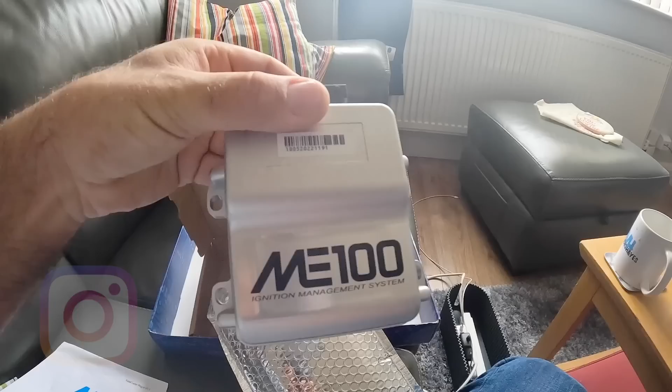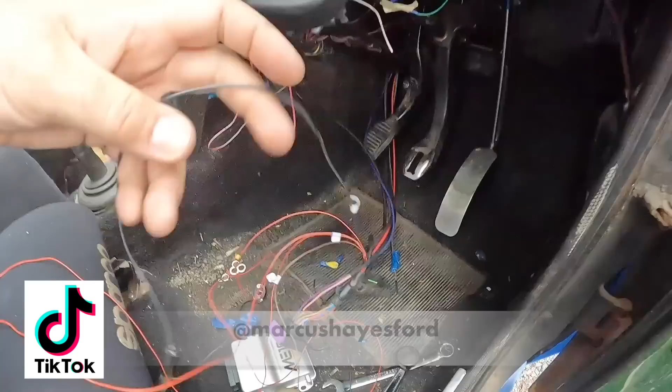One company that I've trusted with my engine management, Motorsport Electronics. The brand new ME100, packed full of features. Get this ECU installed. Maude, my Motorsport Mk2 Escort, finally ready to plug everything in. Red wires, 12 volt feed, black wire to ground. So, moment of truth, key on. Yeah, these Motorsport Electronics ECUs, they always fire up straight from the base map.

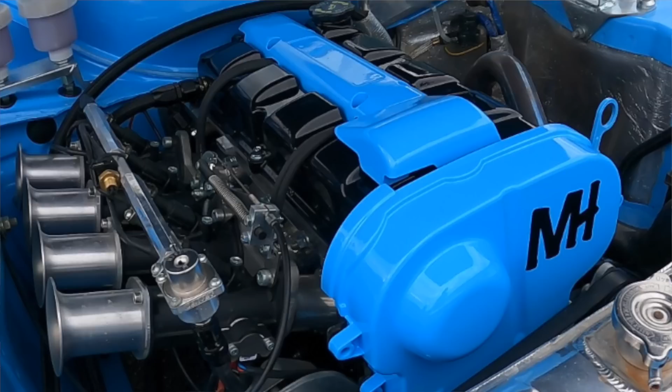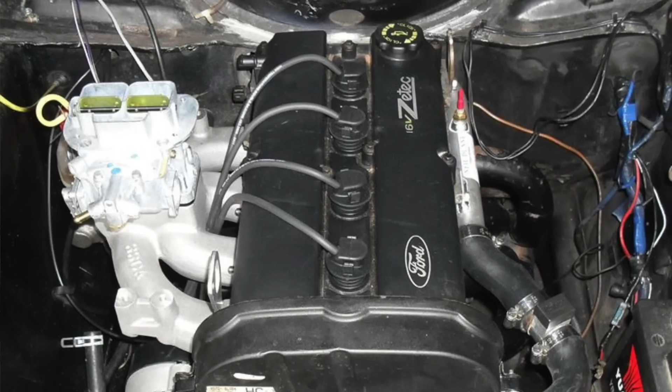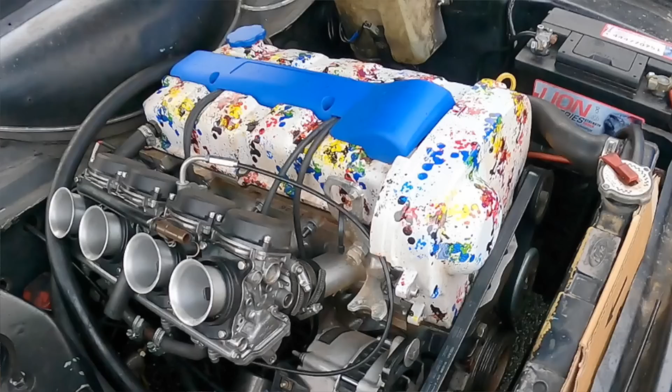My favourite car, a Mark 1 Escort that I like to call INSTA, is running a fuel-injected ST170 engine, and that's controlled by an ME221 ECU from Motorsport Electronics, which is an awesome bit of kit. But today we're going to be looking at another Escort that I own, a four-door Mark 2 that I like to call Maude. Now previously she was running a normal 2 litre Zetec engine, which was controlled by an old Nodez Pro ignition only ECU from Motorsport Electronics, which controlled her very simple setup very well. But when I switched to an ST170 engine, I needed something that could control the VVT on an ST170. So I needed to upgrade to the ME100 ECU from Motorsport Electronics.

Now recently, Motorsport Electronics decided to update their ME100 ECU, and they very kindly sent me their brand new version for me to try out. So yeah, I'm really excited to be one of the first people in the world to try the new ME100 out. So I think it's about time we have a look in the box to check out the new ME100.

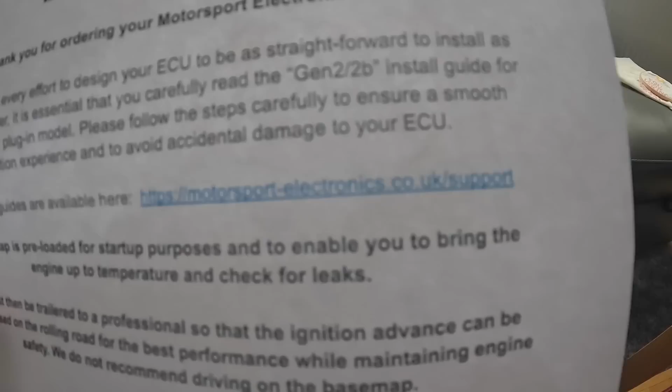Alright, now I have already had this open, but if we open the outer box, you're first greeted with this letter from Motorsport Electronics with some useful information about where to find your install guides and that sort of thing. Now inside this box you've got two boxes, one's got the ECU and one's got the wiring loom. So there's the wiring loom, which we'll have a look at in a minute. But in here, inside this jiffy bag, we've got the new ME100.

A couple of things that are new about this compared to the old ME100 is that this is now in a proper waterproof case. So you could, if you wanted to, mount this in the engine bay rather than bringing it inside the cockpit. And it has a status LED, which I think is going to be a really useful addition. And in terms of what it does compared to the Nodez, it's basically the same sort of thing, but this is capable of running the VVT on an ST170 engine. I think it's really cool that Motorsport Electronics do various different ECUs depending on what setup you've got. Anyway, that is the ECU.

And I think before we have a look at the loom, I'll quickly show you on their website all the features. As I say, I'm not an expert, so I might as well just show you what it says on the Motorsport Electronics website. So onto the Motorsport Electronics website. I'm just going to go over here to the Nodez Pro ignition only system and click that. As I say, the new ME100 is based around the new Nodez.

And down here you can see the key features: 16x16 3D ignition table, direct coil drive, wasted spark ignition. The Motorsport Electronics ECUs actually have the coil drivers built in. You don't need any separate EDIS modules or anything like that, like you do on some ECUs. It works for various different trigger patterns, which basically means you can use it on Ford engines, Vauxhall engines, all different engines.

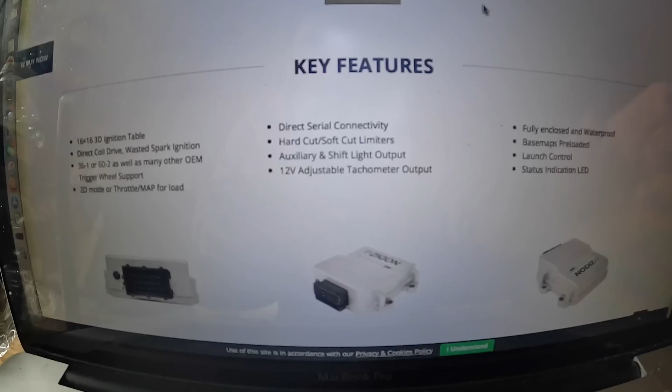You can run it in 2D mode, which is a really simple way, or you can have throttle position sensor or map sensor for load to make it 3D. Direct serial connectivity, which is basically the fact that it connects directly to your laptop with a wire. You've got hard cut and soft cut rev limiters, auxiliary and shift light outputs. Got 12 volt adjustable rev counter or tachometer output.

As I've already mentioned, the casing is fully enclosed and waterproof. It comes with a preloaded base map. You've got launch control, and as I've already mentioned, this one has the status indicator LED. So yeah, packed full of features. You can run a shift light, you can run your launch control, and as I say, the ME100 has the added ability of running the VVT on your ST170 engine.

Now let's have a little look at the loom. Because the new ME100 isn't available yet, and because it's based around the Nodez, Motorsport Electronics have actually sent me a Nodez loom, but they did add the connector for the VVT control. But one thing I did have to add myself, which was available separately from the guys at Motorsport Electronics, is the throttle position sensor wiring, which isn't necessary if you want to run it in a more 2D mode, but I've got a throttle position sensor on the bike carbs on this car.

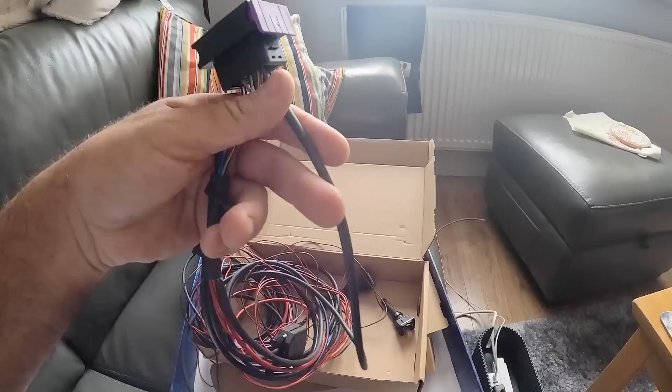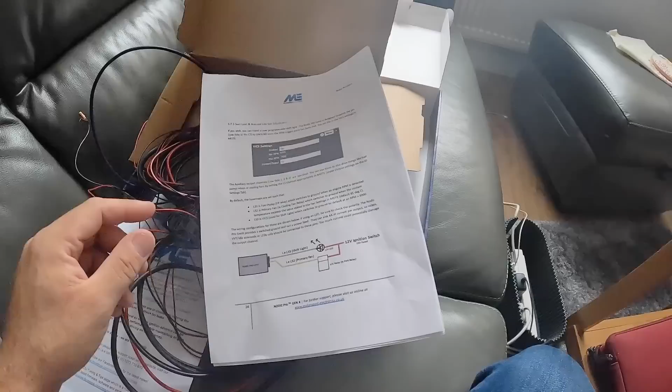And yeah, it was really, really simple to install. Obviously, I had to take apart the multi-plug carefully and stuff, and just poke the 3 wires for the TPS into their relevant pins. The user manual makes it really clear and shows you which pins those wires need to be pushed into. I've actually printed out a few pages of the user manual just to take with me around the garage today. And here's the table showing what wires go into where.

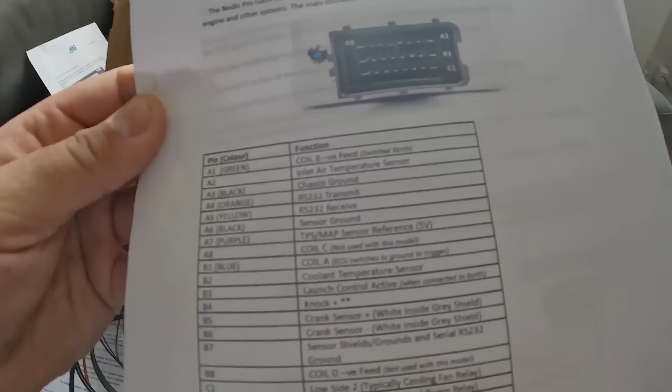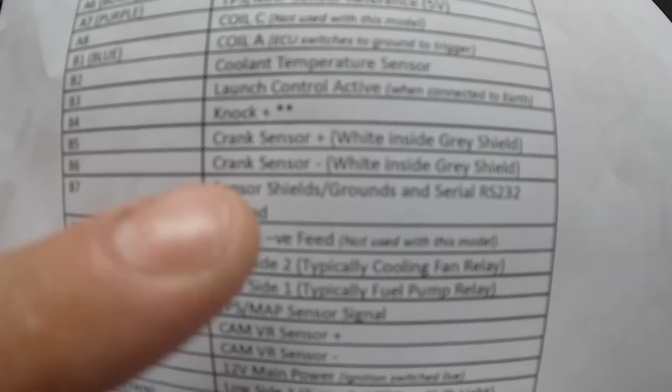You can see here, TPS map sensor reference. That was one of the wires I had to install. TPS map sensor signal. That was one of the others. And then any sensor wires that you add, the ground wire for those needs to go to this one, which is A6. So yeah, simple enough to do.

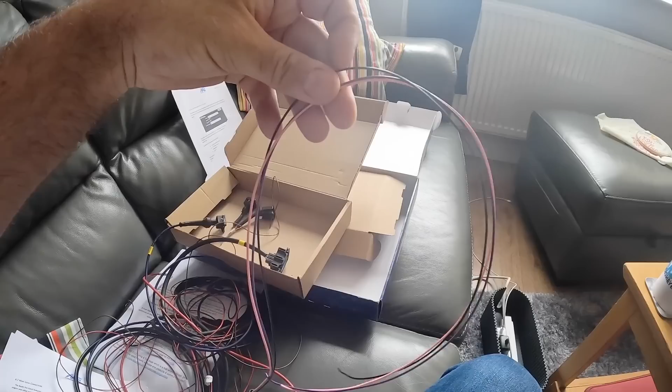One thing I am also going to need to do is change the plug for the cam sensor. This actually came with a normal Zetec cam sensor plug on it because, as I say, it is a Maude loom, but I did have an ST170 cam sensor plug on my old ME100 loom. So I just need to add that to the loom when the time comes, and I need to finish up the other end of the TPS wiring that I just showed you. The reason I haven't finished those up yet is because I may as well run the leads in the engine bay and then make those wires the correct length that they need to be, rather than them being too long and it being any less tidy than it needs to be.

So yeah, I hope all that made sense. As I say, I'm not an expert. I hope I haven't waffled too much. I think it's about time I boxed this all back up and got myself round the garage where the car is, and then we can get this ECU installed. So I'll see you in a sec.

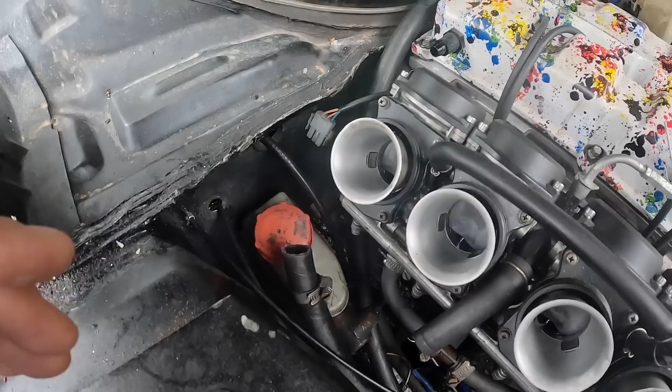Apologies for the background noise, the gardeners are mowing the lawn, but I am now around the garage with Maude, my four-door Mk2 Escort. And the first thing I think I'm going to be doing in terms of installing this ECU is running the wiring loom where it needs to go.

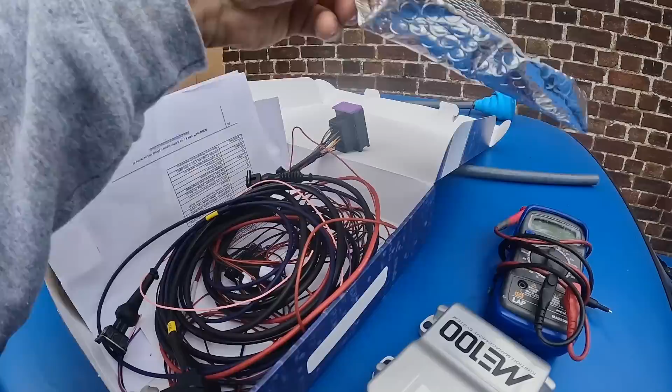Now, I've actually got a hole in the bulkhead down here, which I've used for the wiring loom for the ECU before. For those who are interested, that massive hole was actually originally drilled in the bulkhead to run the oil pipe through. I've got one there and one that side because this car used to run a dry sumped crossflow. Anyway, back on topic. As I say, I'm going to run the wiring loom. Rather than trying to pass this through, I'm going to try and pass all these smaller plugs through from the other way individually. This is the largest of them all, that's the coil pack plug.

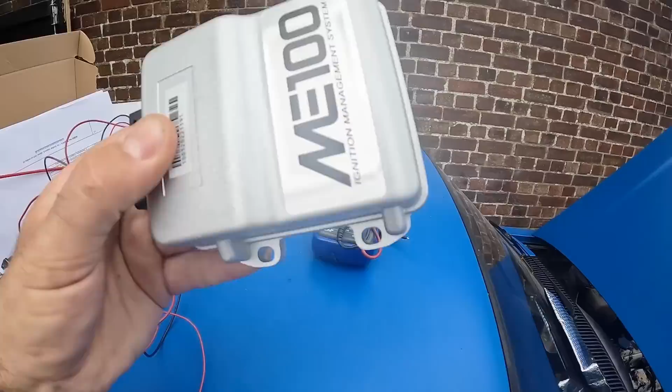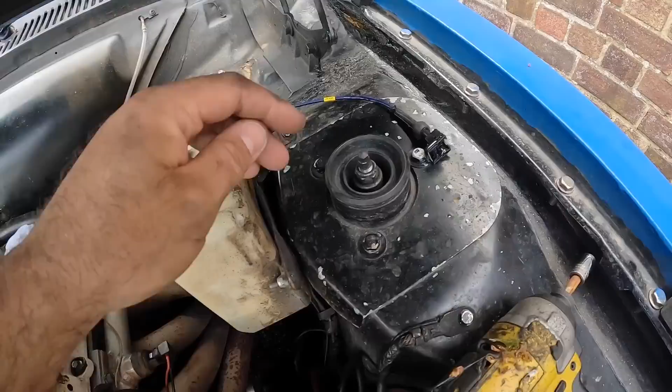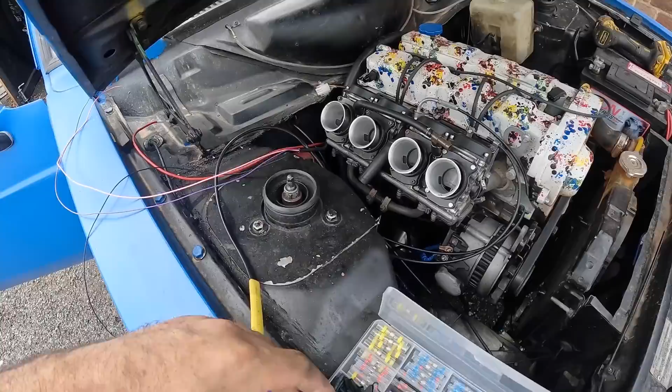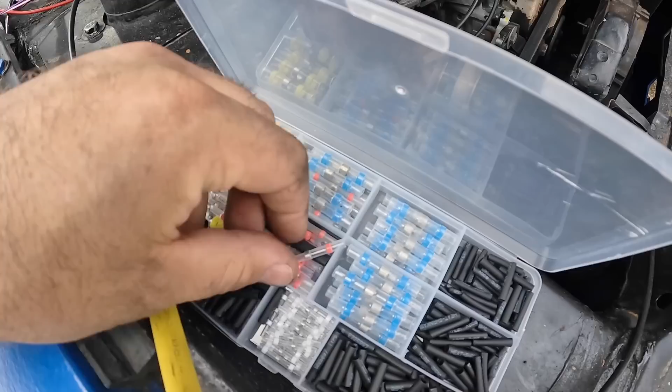But as I've already mentioned, because the new Maude and the new ME100 is waterproof, you could just mount the ECU in the engine bay, and then you only need to run a few thin wires through into the cockpit to wire it up. It's just these black and red ones. But I'm going to be mounting this inside on my switch panel. It's cool that because this is waterproof, you can choose where you want to mount it. So I'm going to see if I can run these wires where they need to go, and then I'll catch up with you afterwards.

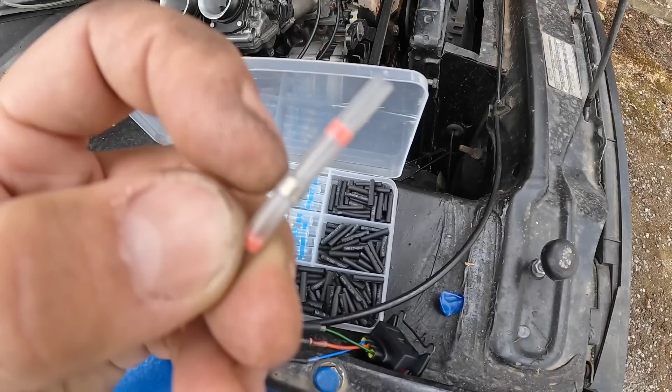Alright, so I've taken my time and I've made sure that I've got all the wires that need to be in the engine bay side through that hole in the bulkhead. In the cabin now, I've just got the multi-plug for the ECU, because as I say, I'm going to be mounting the ECU inside the cabin. And then I've got these thin wires here. The red ones are power, the black one is ground, and the brown one is for rev counter.

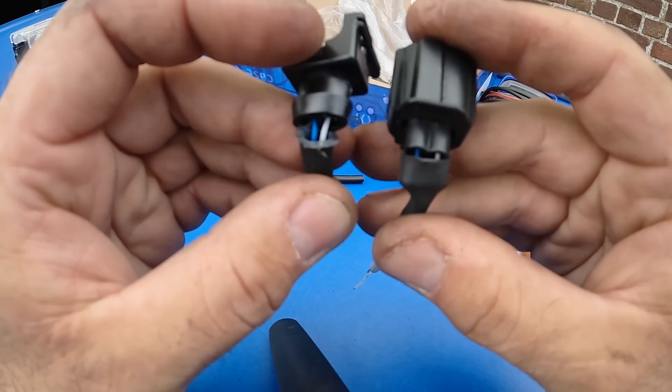And then round to the engine bay, I've got the cam sensor wire here, which plugs into the cam sensor there. I've got the throttle position sensor wires here that plug into this, which is the throttle position sensor wiring. Both of those need the plugs added to them. Over this side, I've got the crank sensor plug, because the crank sensor is down there.

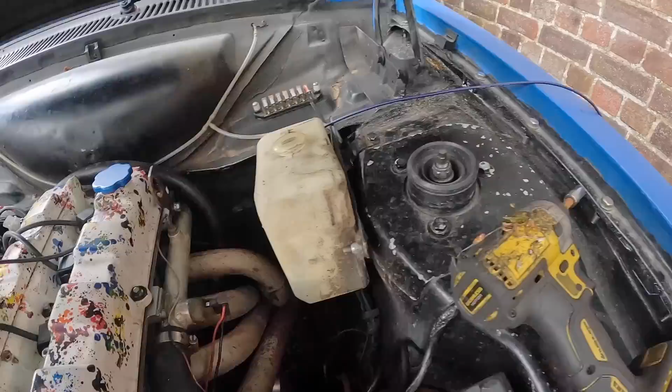And over here, I've got the coil pack plug, which I actually ended up cutting and then feeding the wires through and then reconnecting the plug, because this was a little bit too big to get through that hole without me risking putting the wires under strain.

And I'm actually using these solder crimps that I've never used before. Basically, you feed this onto one wire and then twist it to the other side of the wire and then pull it back through so that your joint is here, and then you heat this up, and that's actually solder in there, so it solders the joint.

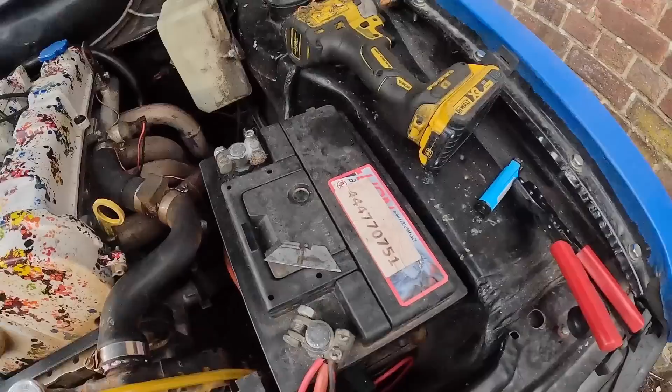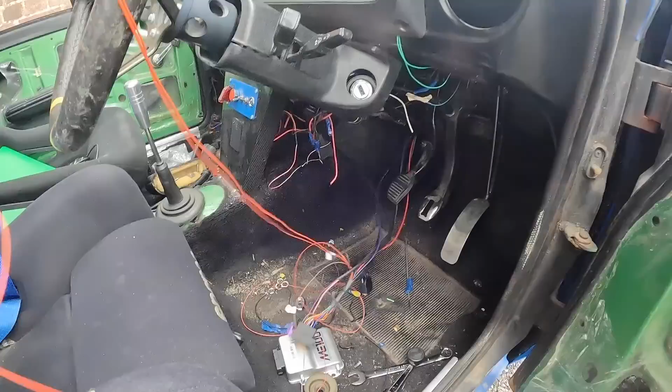But what I did do is I threaded on an extra bit of heat shrink before I started, so that then I can put that over just as a double layer of protection. So yeah, just need to heat this one up and then that'll be sweet. Do have this yellow heat shrink to pull over the lot of it afterwards. Going to cut this original insulation off. Unfortunately, I didn't have any big heat shrink that was black, but that'll be a nice reliable connection. And as I say, all the wiring is now where it needs to be.

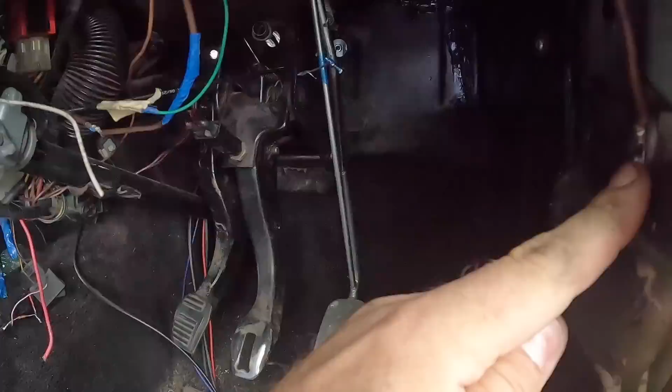What I'm going to do now is put the ST170 cam sensor plug on here, and I'm going to put the throttle position sensor plug on here. Now, because I had the old ME100 in the car before, the throttle position sensor is actually going to be very easy. This was actually a plug that I added myself to the old ME100 loom, and I made sure that the colours of wires were in the right place, and when I put the pink, black and purple wires onto this loom, I made sure that they were clicked into the right place.

I've literally just got to join these up and match the colours, and then I'll be able to plug this into the plug that's already attached to my throttle position sensor. So yeah, just plug that in there, and then I'll be able to calibrate my throttle position sensor and use that how I was before.

But if you need to wire up your throttle position sensor for the first time, like I had to on the old ME100 and like I had to on my Mk2 Escort that's running the ME2 ECU, it's very clearly explained in the manuals for the ECUs, which can be downloaded from the Motorsport Electronics website.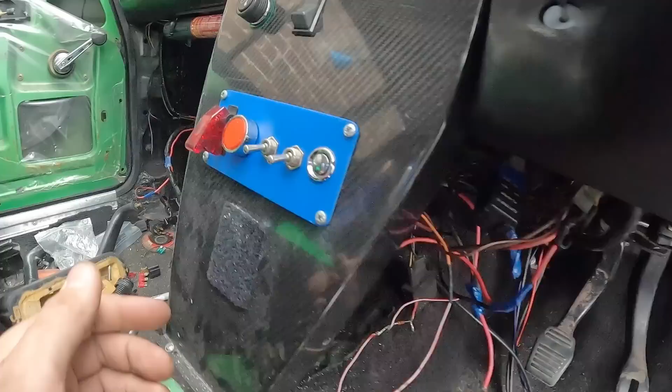And I will just quickly mention that with the two types of cam sensor plug, this is the ST170 and this is the normal Zetec one, the wires that Motorsport Electronics have used are the same colours. So again, I've just got to match blue for blue and white for white. It does have this extra wire here, which I think is like a shield thing, and that doesn't seem to actually go all the way to the end. It doesn't connect to any of these, but I will join that with the one that's on the loom anyway.

But just like earlier on, I'm not going to bore you with the process of me sorting out all these plugs. I'm not an auto electrician anyway. I'm just going to crack on with it and I'll show you what it looks like afterwards.

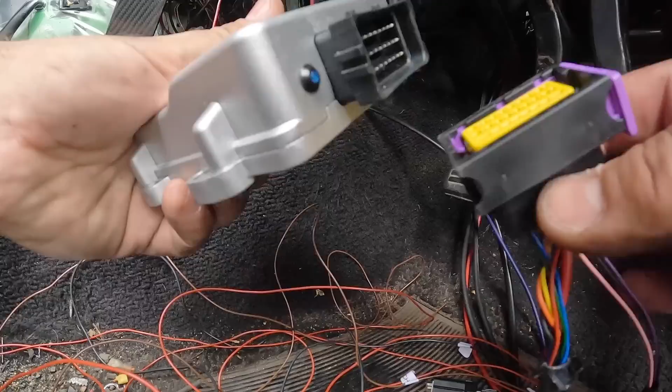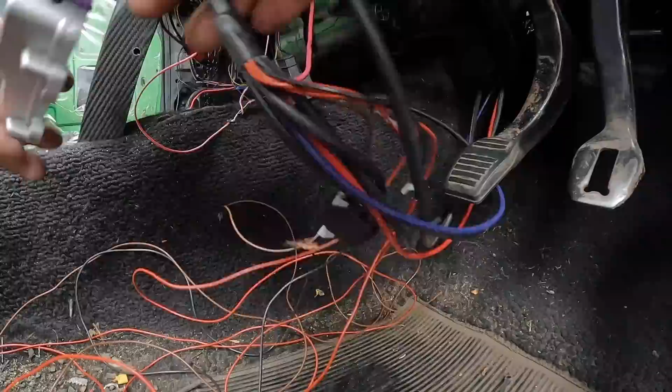Alright, so I'm finally ready to plug everything in the engine bay side of things. There's the VVT solenoid plug there. Don't think I mentioned that one earlier. Bit of a wiggle and she's on. Cam sensor there. I can plug my existing throttle position sensor plug into the loom like that.

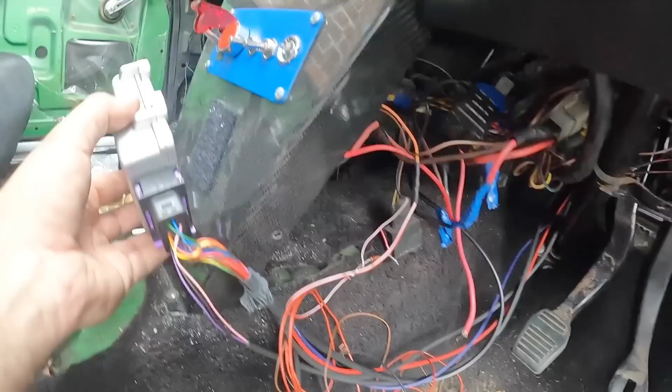Now my coil pack is actually mounted under the inlet manifold. That is the coil pack plugged in. And then we've just got the crank sensor, which is an absolute nightmare with this exhaust manifold, but we'll get it done.

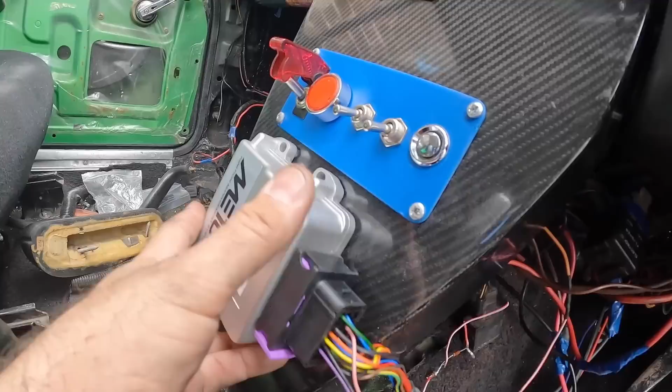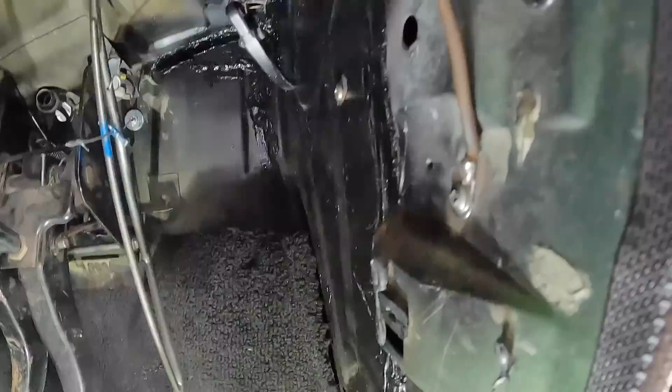So yeah, you can see the crank sensor plugged in down there, but definitely need to lose some of this excess wiring. Don't want that rubbing on the exhaust. What I normally do is add like a heat-proof sleeve to the crank sensor wiring, just because it's so close to the exhaust manifold, but I don't have that stuff in this garage. That's in the garages where I store my other cars. So for now, we'll just make sure that it's not leaning on the exhaust manifold.

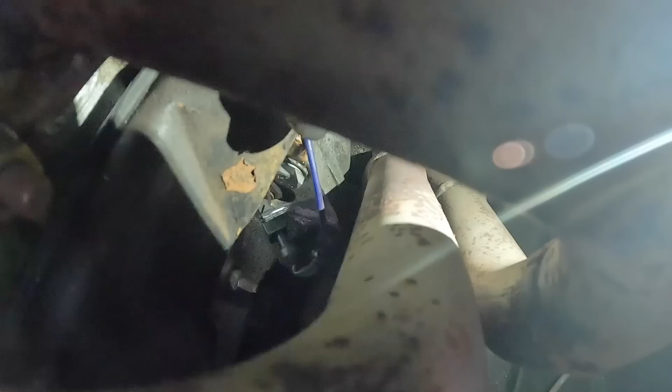So that's the engine bay side of the wiring. So now I'm going to move inside the cabin and actually go about powering up the ECU. Before we mess about with those wires inside, we're going to disconnect this battery. So inside the cabin, powering up the ECU is literally a case of hooking all these red wires from the plug and play loom up to a 12-volt switched feed, and hooking up this black wire to ground, which basically means it needs to go to the body of the car.

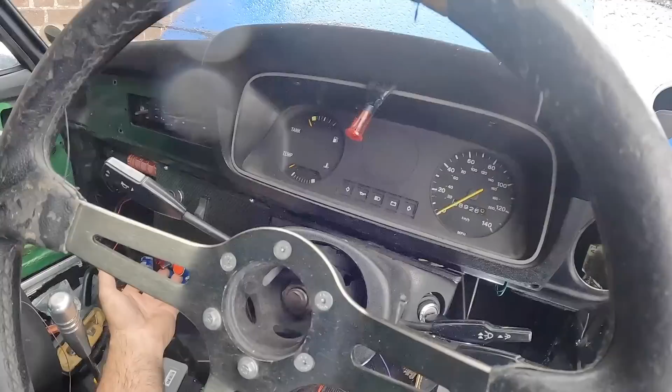Now, because I've already had an ECU wired up in here in the past, this is my 12-volt feed, and this brown wire here goes to the body. Now, the 12-volt feed should be wired up through a relay, and I've actually got relays over there on the kick panel. One's for my fuel pump and one for the ECU.

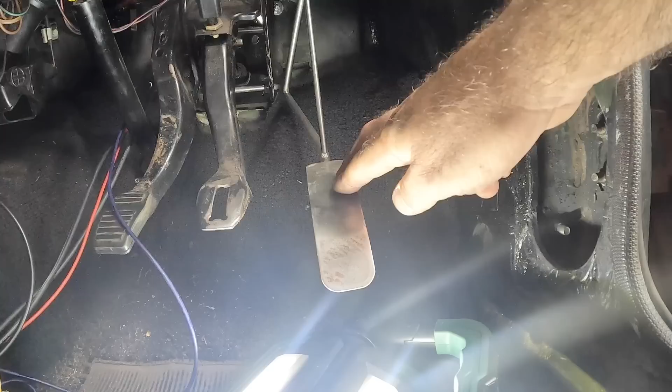Now, there are loads of videos on YouTube showing how to wire up a relay and what exactly it does, but basically what it means is that you're not putting the whole feed through your ignition barrel and then to the ECU. You're taking a small bit of current through your ignition barrel, which triggers the relay, and then the other side of the relay is connected directly to the battery, and the higher load that will be powering the ECU goes from the battery straight to the ECU.

I hope that makes sense, but as I say, I'm not an auto electrician, so check out the other videos on YouTube showing exactly what a relay does, but you should run your ECU through a relay. Now, the way that my car's wired up is you put the key in the ignition and turn it, and then it sends current to this switch panel, and then if I switch on this main power switch, it powers up everything on the car. This is actually the start button to start the engine.

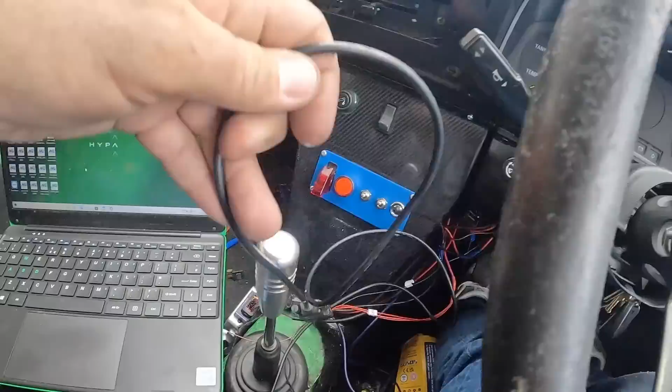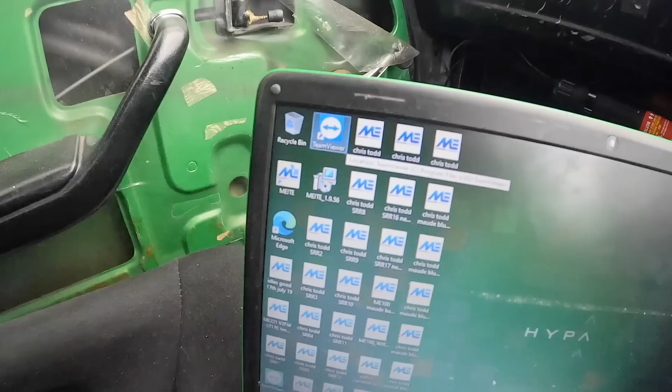But yeah, from here it then goes into the relays, and on the earth side of the trigger side of that relay, it then goes back through this switch. So once this is powered on, and once the switch for the ECU is on, it completes the circuit to ground, the relay clicks on, and then the ECU comes on. So all I need to do, because my relays are already set up from before, is hook up these 3 red wires to this red wire here, and the black wire to this brown wire here.

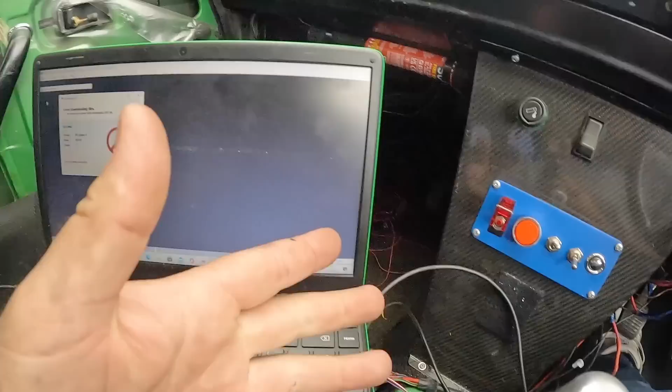So I'm just going to plug the plug into the ECU. Got this purple bit that you pull out, and then click it in. Start thinking about where I'm going to be mounting this and how exactly the wires are going to be, because I want to cut all these red wires shorter so they're not stupidly long.

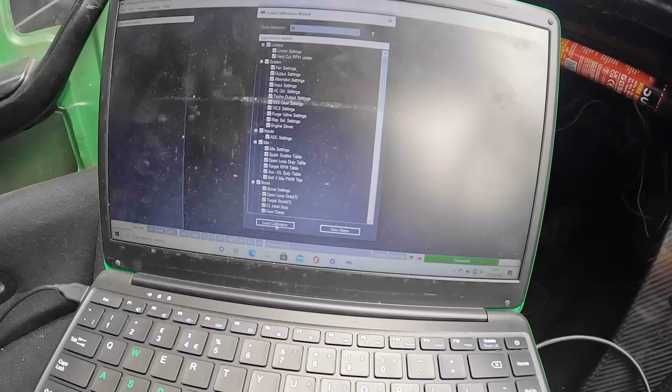Now, annoyingly, I don't have my roll of Velcro here. I like to Velcro these to the switch panel, because then if you ever park it up somewhere and you're a bit unsure about leaving your car there, you can literally unplug the ECU, put it in your pocket, and it adds another layer of security. But yeah, I just want to roughly get this in place and roughly cut these red wires and the black wire to length, and then we'll wire them up.

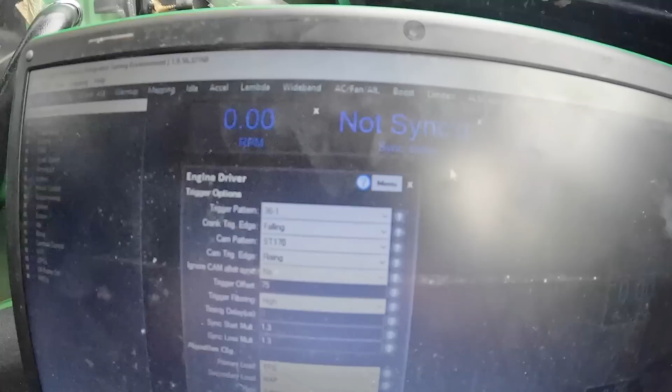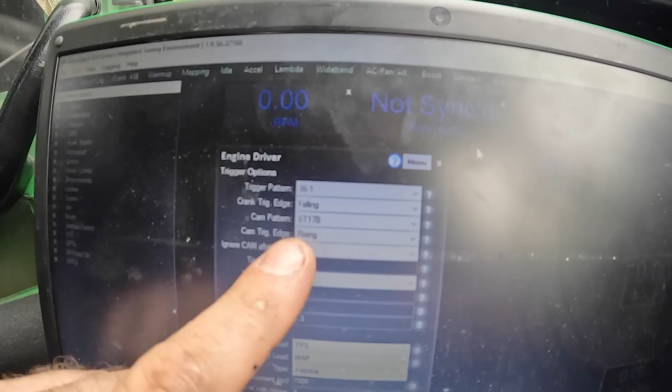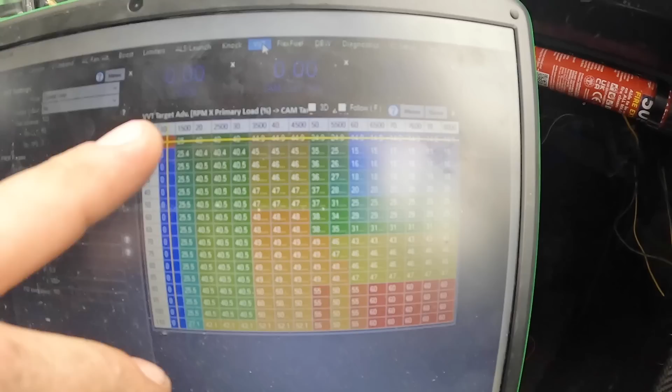Alright, so now in theory we have power going to the ECU, and we've got the ground going to the body. I'm going to pull some of the slack on this crank sensor wire, so I don't want that wire rubbing on the exhaust. I can see now that that purple wire isn't leaning on the exhaust. So yeah, just a final check that everything's plugged in, and we should be good to go. Now, the ME100 will have some sort of base map loaded onto it, obviously to suit a Zetec or an ST170. I'm pretty confident that this will fire straight up.

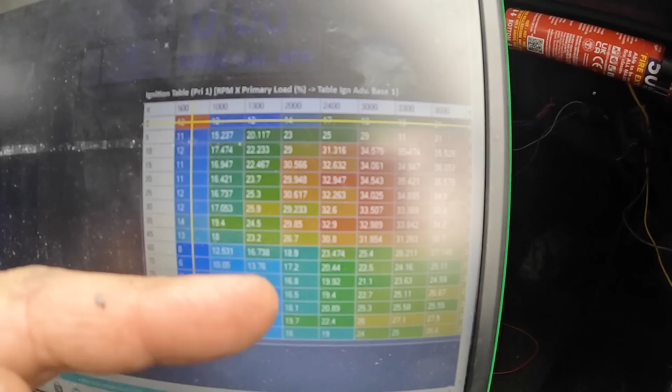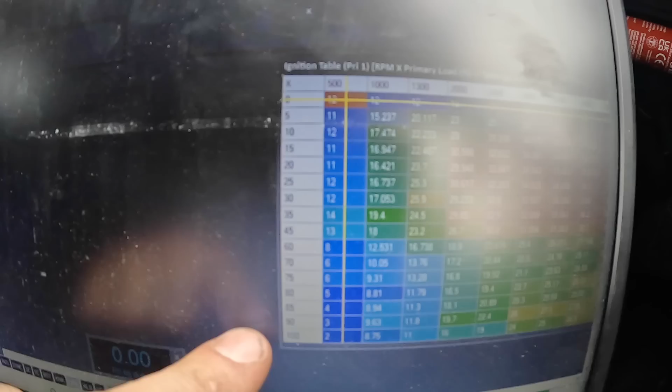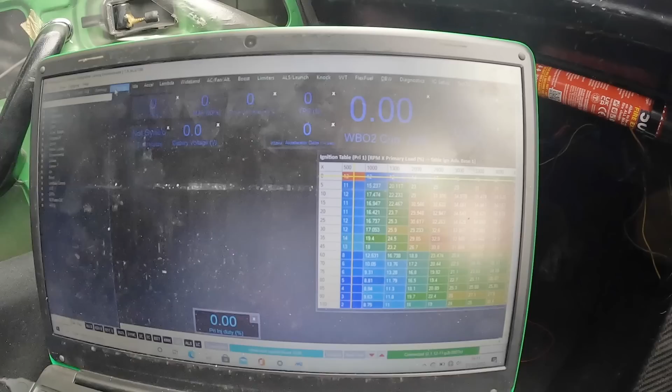So, moment of truth, key on, and then this up, which should bring up, yep, the dash lights. One of these will be fuel pump. It must be this one, that must be the ECU. As you can see, the LED is flashing on the ME100, so that's the ECU powered up. Now I can power up the fuel pump, check she's in neutral, push the start button. She's definitely trying to fire. Yeah, this car hasn't run for weeks, that's why it took a while.

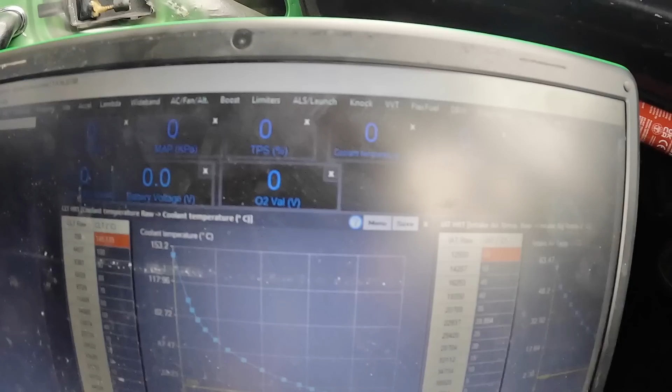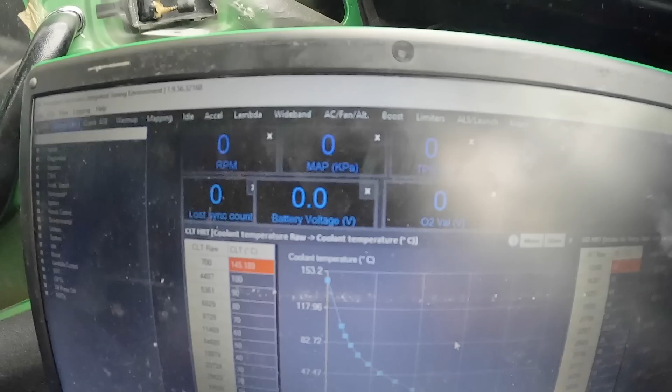And it runs. Running all 4 cylinders, idling pretty good, to be honest. Yeah, these Motorsport Electronics ECUs, they always fire up straight from the base map, but you do need to go and get it rolling roaded and tuned properly to get the most out of them.

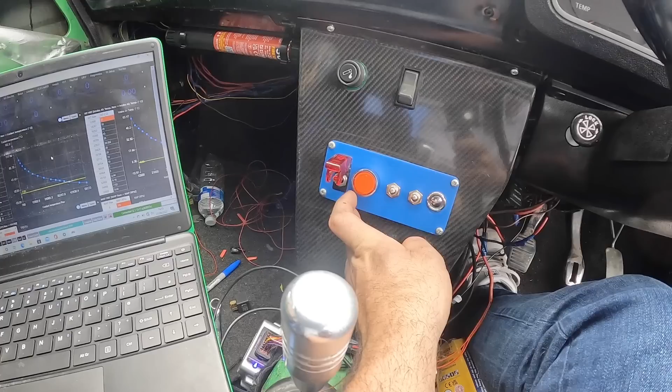Okay, we'll flick that off, and now we'll fire up the laptop and see exactly what's going on with the settings on the ME100. All right, so I've got my laptop on, and I've now got the ME100 plugged in to the laptop. This little connector here that comes out of the back of the loom near the ECU plug has got a connection so you can hook up these wires, which then go into the USB port on your laptop. You can get these wires from Motorsport Electronics.

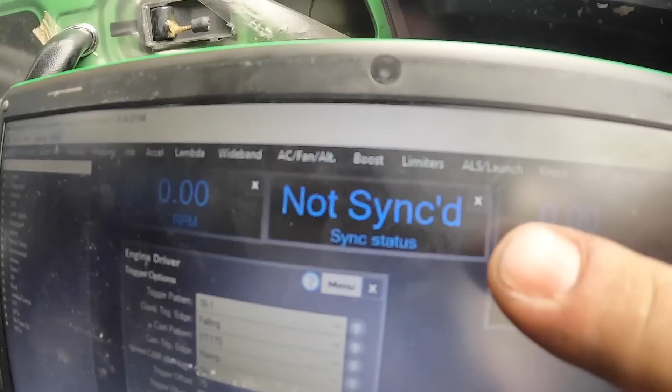Anyway, I'm going to open up the MITE software, which stands for Motorsport Electronics Integrated Tuning Environment. This can be downloaded from the Motorsport Electronics website. So we'll just double click that. Wait for the software to load up. Click the key on, put this switch on. Don't need the fuel pump on. And the ECU switch is already on.

Now we've got a bit of an error here, although the ECU has connected because it's green. And I'm guessing this is because I've used this software on older ECUs, so the old ME100 and the ME221. Okay, so it looks like it wants to update, but I don't have any internet around here. What I'm going to do is I'm going to try and load my old map into it. Don't think it's going to work.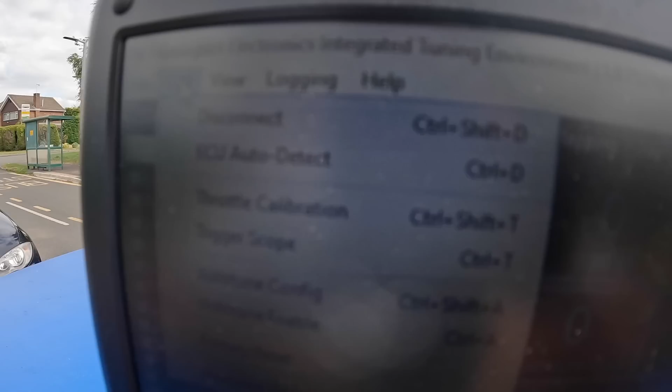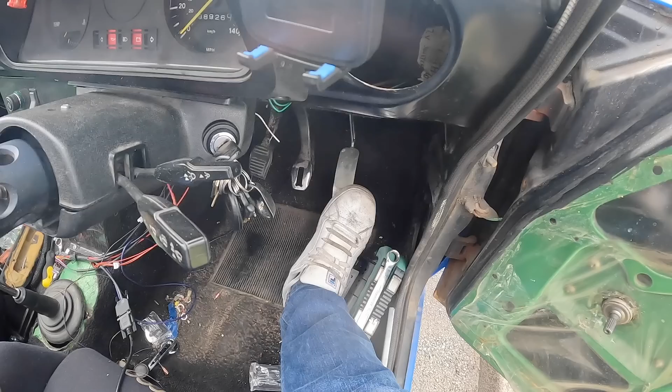There it is there. ECU data not fully loaded or still trying to connect. Would you like to switch off line mode? Yes. Right, let's just load it, see what happens. Do you want to send this data to the ECU? This will erase the existing data. Yes. Calibration loaded successfully. It looks like my map has now loaded into the new ME100, so yeah, everything should be how it was on my old ME100.

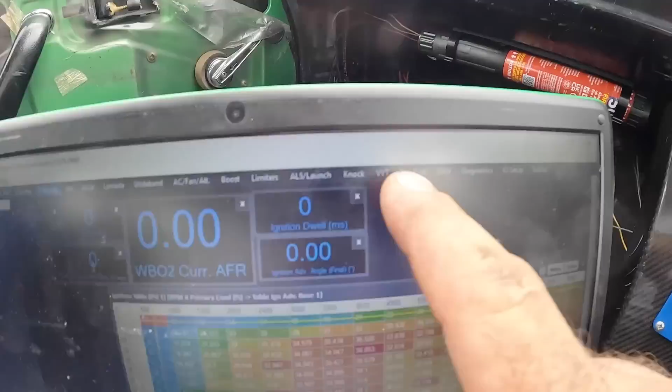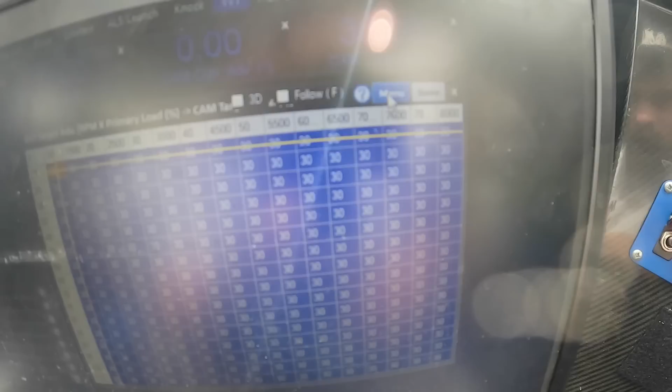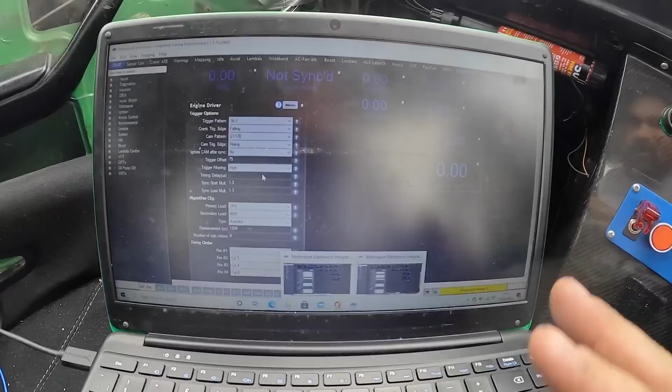I will just show you a couple of things. The cam pattern here, when it's set to ST170, that's what you need to do when you're running an ST170, obviously, and that turns on the cam sensor and allows the VVT to run. Now, if we go up here to VVT, you can actually see that the VVT is fully mappable on these ECUs. There's literally a table where you can determine how much cam advance happens at whatever revs that you want. So yeah, there's the revs across the top there, and there's the throttle position, and these numbers here are the advance values.

And then obviously if you go up to mapping over here, you have your normal table for your ignition advance. So this is how many degrees before TDC the spark happens on the spark plug. So again, at the top you've got revs, and down the side you've got throttle position. So it's a proper 3D map, but you can actually run it on 2D. So if you haven't got a throttle position sensor, it will literally just determine it by the revs, which is how I had the old engine on this car set up.

Now we'll go up to sensor calibration, because I suspect that the throttle position sensor will need recalibrating. It's actually really simple. Actually, I think it's up here. If you click up to ECU and then throttle calibration, okay, that option isn't actually allowing me to select it. Now, I've just noticed that I'm not getting any values at the top. No battery voltage, nothing. Now, when I spoke to one of the lads earlier at Motorsport Electronics, he did say that my map file won't work on this ECU at all, and it seems to be able to load it into the ECU, so maybe that's why certain things aren't working, because it's not really a compatible file.